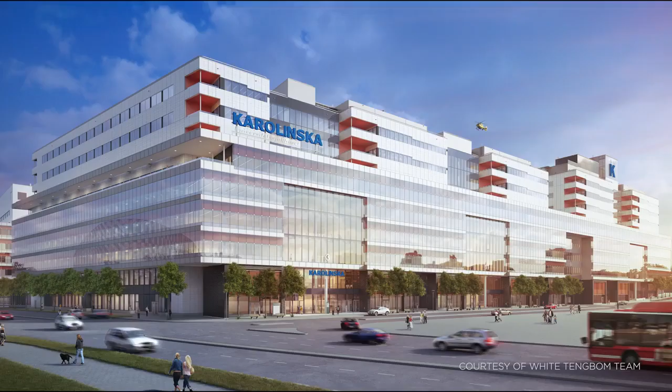Sweden's New Karolinska Solna Hospital in Stockholm is one of the largest and most advanced healthcare facilities ever conceived. Once completed, the $1.6 billion building will contain over 8,000 rooms and treat up to 1,800 patients a day.

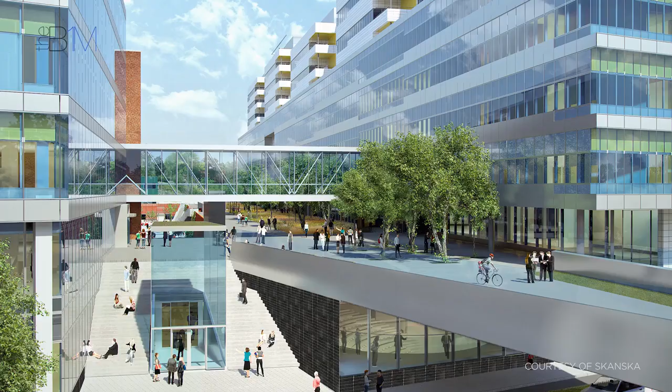There'll be 36 operating theatres, 8 radiation units, 168 examination rooms, a research lab and numerous classrooms across some 320,000 square metres of indoor space, a floor area greater than that of the Burj Khalifa.

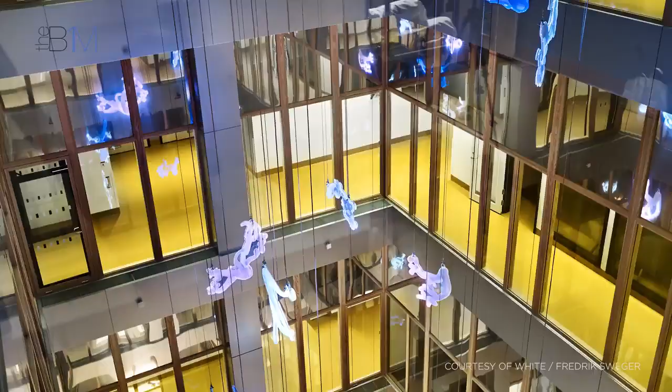The facility is set to be accompanied by a patient hotel, parking garage, research building and a dedicated subway station. Designed by two of Sweden's most renowned architectural practices, White and Tengbom, the project aims to be an exemplar healthcare facility, passionately pursuing a patient always first vision.

All inpatients will have private rooms, with associated hygiene facilities and space for relatives. The floor plan has been optimised to reduce patient travel distances. Specialist departments are spread throughout the hospital, negating the need for patients to be transferred between departments for therapy. MRI scanners, for example, are located throughout the building rather than in one single location.

Taking such a project from concept to reality is far from easy. New Karolinska Solna was designed with one of the world's most advanced mechanical and electrical installations and faced the prospect of being constructed alongside the existing operational hospital.

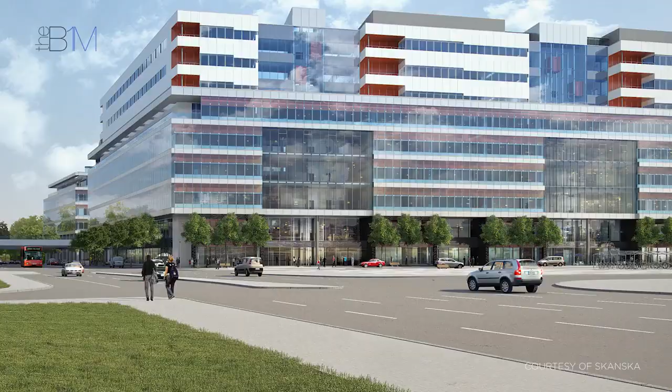Further, the new building was required to meet the highest technical installation standards and sought an ambitious LEED Gold certification for sustainable design. To successfully plan and deliver the scheme, the project team embraced building information modelling, making it Sweden's largest BIM project to date.

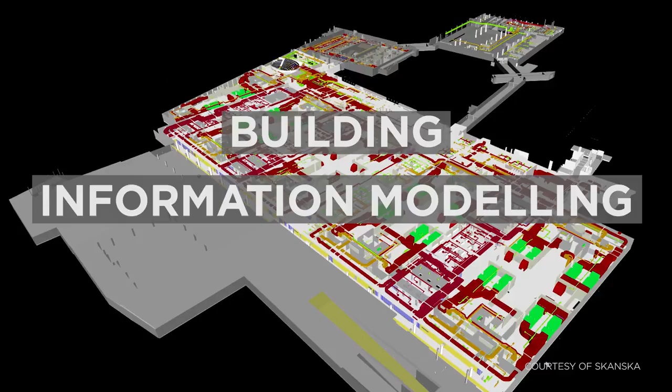Stockholm County Council, who commissioned New Karolinska Solna, required that the project be developed in a BIM environment from the outset, appointing their project team on that basis.

All parties, from the architect and contractor through to mechanical and electrical engineers and the facade consultants, shared their graphical and non-graphical data within an online space known as a common data environment, hosted on a central server.

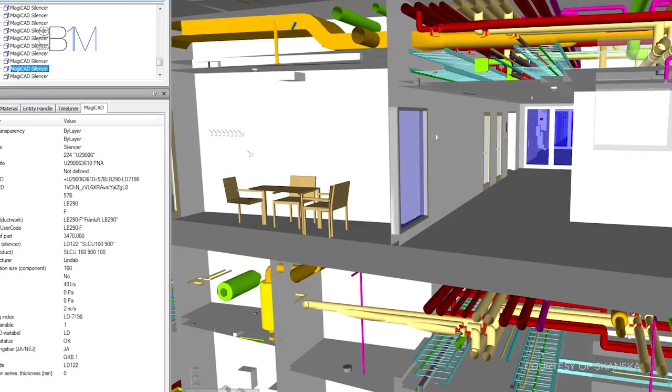Design team members exchanged their graphical model files with each other weekly, federating their component files into one model that could then be reviewed in fortnightly design coordination meetings chaired by lead contractor Skanska.

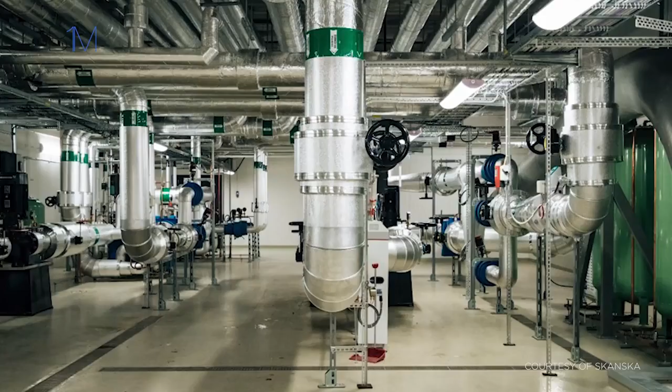These sessions enabled the hospital's design to be tested virtually before it was constructed for real out on site. Numerous hard and soft clashes were resolved, saving hundreds of hours of potential rework. The bi-weekly process was repeated until the building's proposals were well honed.

Design iterations occurred faster, risks were identified and reduced, and the wider project team could complete cost and programming analysis on the data generated. Such an approach meant that almost every aspect of the scheme had been considered in advance of construction, and that the team were extremely well informed before a spade ever entered the ground.

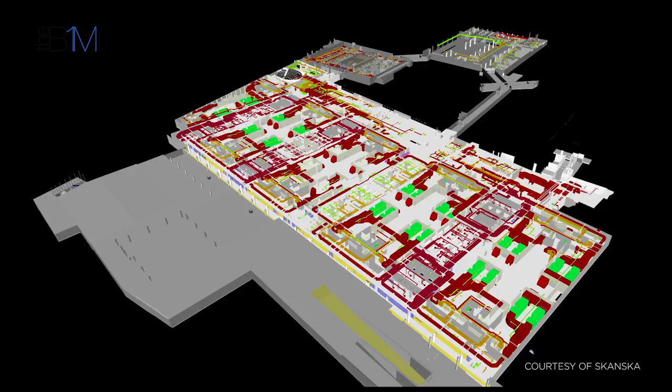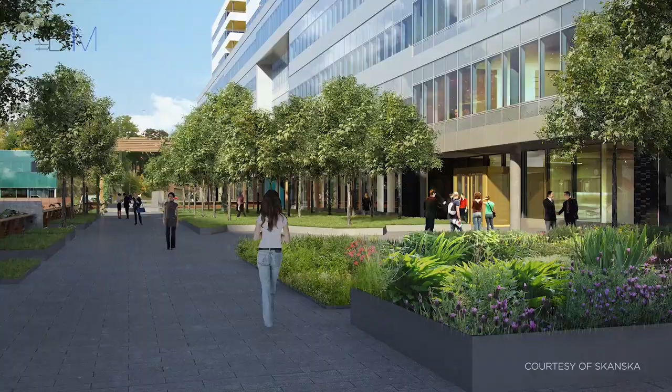Beyond the work of the core design team, the project's graphical information model has been populated with almost 1 million objects from some 400 contributors across the supply chain. A single data standard, set out clearly in the project's BIM execution plan, has helped to ensure that information is well structured, enabling a smooth transition from construction to the operational phase.

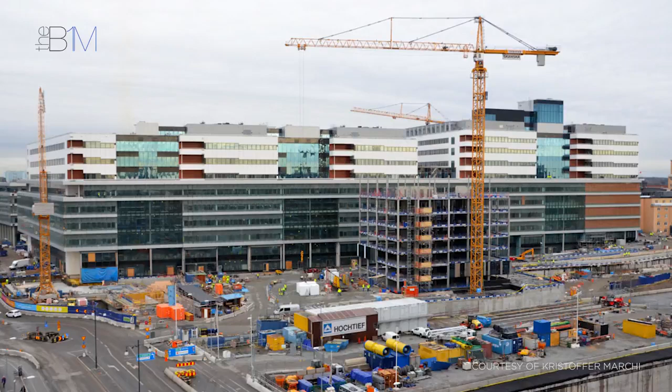The benefits of BIM are also being felt on site, where supervisors, site managers, engineers and contractors can access the model via tablet devices. The latest and most up-to-date documentation is put into the palm of their hands in a well-ordered database, negating the risks of hard copy and the time that could be wasted searching for information, especially on a project of this scale.

As if the scheme weren't complex enough, the new hospital's site can only be accessed from one of Sweden's busiest roads. Over 300,000 deliveries are expected during the construction works, and these have been planned in advance and booked in electronically using delivery management software.

The system tells the driver their delivery time, the GPS coordinates of the gate they should use, and allows them to book the crane, forklift or lifting equipment needed.

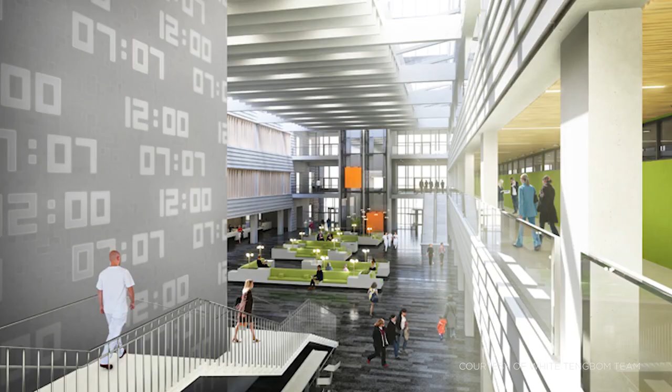New Karolinska Solna is the first project in Sweden to be delivered under a public-private partnership or PPP finance model, and Skanska, along with their development partner Innisfree, will be responsible for operating the facility until 2040.

As construction works complete, the project's information model will be verified and updated with as-built data as required. It will then be passed to the building's operators as an asset information model that informs lifecycle costing, optimum operation and maintenance of the live building throughout its life.

The Advanced Hospital is incorporating numerous technological solutions to improve its operational efficiency. Most intriguing are perhaps the 29 Automated Guided Vehicles, or AGVs.

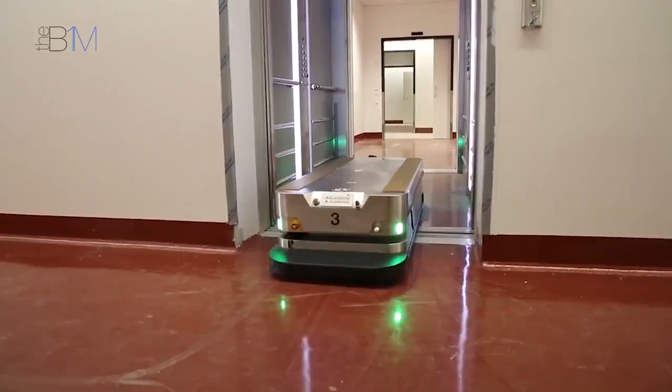These robots will transport goods around the hospital using dedicated passageways and elevators, freeing up time for clinical and support staff to focus on patient care. The highly automated AGVs will run around the clock, completing up to 1,600 transports every day.

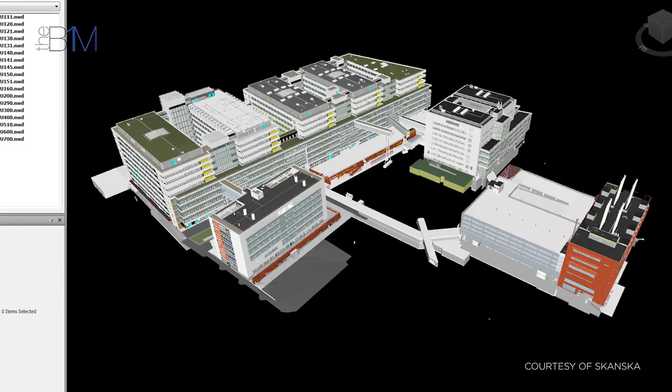Whilst the final outcomes are still to be seen, the project stakeholders agree that working in a BIM environment has been indispensable to the success of such a complex project.

The new Karolinska Solna Hospital is set to become a cutting-edge healthcare facility and a unique environment for world-class medical research. A significant BIM case study both for Sweden and the global construction industry.